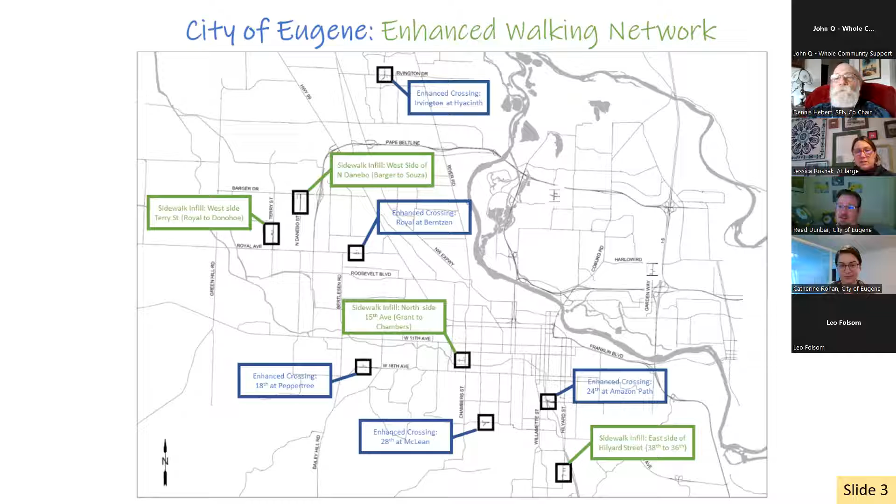And so we had talked about this, I think, for many years as we were scoping out both the East Amazon Bikeway project and then the widening of the sidewalks north of Tugman Park, which will eventually go through Tugman Park as well. We're still looking at some additional monies to widen out that sidewalk through Tugman Park, but that's a different project and that is not this year. So let's go to the next slide, which I think maybe just starts with where the sidewalk is.

Yeah, so that line in yellow is where sidewalks will be added, and it closes the gap from where there are existing sidewalks. So starting basically on that north side of Dillard, all the way up to almost 38th, where there is one lot there that has completed sidewalks, but then between 38th and just north of East 36th Place, there are no sidewalks. So as I mentioned, we secured a grant through ODOT. We currently have the plans at ODOT for review because we're using their money. We haven't heard back from them.

So tonight I'd like to talk about the timeline, but it's a little unknown right now because we wait for them to basically bless our plans and say, yeah, go ahead and go to bidding. But because we haven't bid it yet, we haven't had a contractor review the plans and give us a timeline for construction. So ideally we're going to start construction this year in 2022, and it'll be completed in 2023 for all of those projects I just showed.

Now, if they start any one of those projects in 2022, we've also asked them to finish those projects. So for example, if they decide to start the Hilyard Street sidewalk project, they also have to finish it in 2022. So we're not halfway done, or we leave something unfinished. It will totally be done. And I will get back to y'all once we have the timeline from the contractor, but we haven't bid the project yet. And so you can see what our problem is, we just don't have dates yet that I can share. But that's the extent of the project.

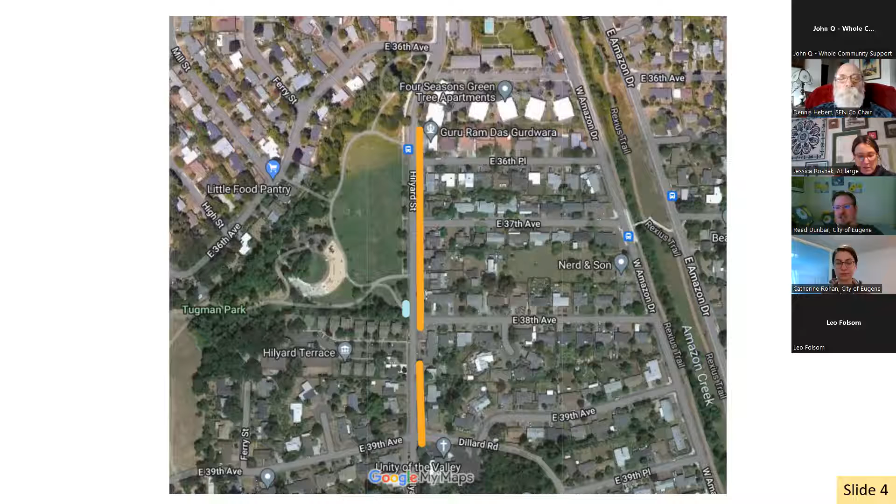The space next to the curb is generally also where a lot of trees live. And so it gives us space for street trees in the future. So sidewalks generally go behind that. And as we go through that, I think you'll notice that we were opportunistic about where the sidewalks were located so that we did not disturb existing plants. Next.

So starting all the way on the south end of the project, that line that goes this way at the top is Dillard. And then on this side, it's Hilyard. And you can see that we're just finishing off a little bit of the sidewalk where it ends. It ends before it actually gets to the corner. So we'll bring the sidewalk all the way to the corner. We'll drop it down at ADA grade, and we'll put a truncated dome in there for tactile detection so that folks know that that's the end of the sidewalk and they're entering the street.

I can see Jessica studying it.

Sidewalks are typically 5 feet wide, and so these are all 5 feet wide. We pour them about 4 inches deep.

That southern boundary is you getting into that church below that, right? Is that where I'm trying to place it here? Sorry. We are south of Tugman Park here, so we're just south of. Is the church there? I guess I don't know. I believe that's the corner of the church. Okay. Yeah, like right at Dillard. South of Dillard is the church. Then yes. Okay, the church is across the street from that.

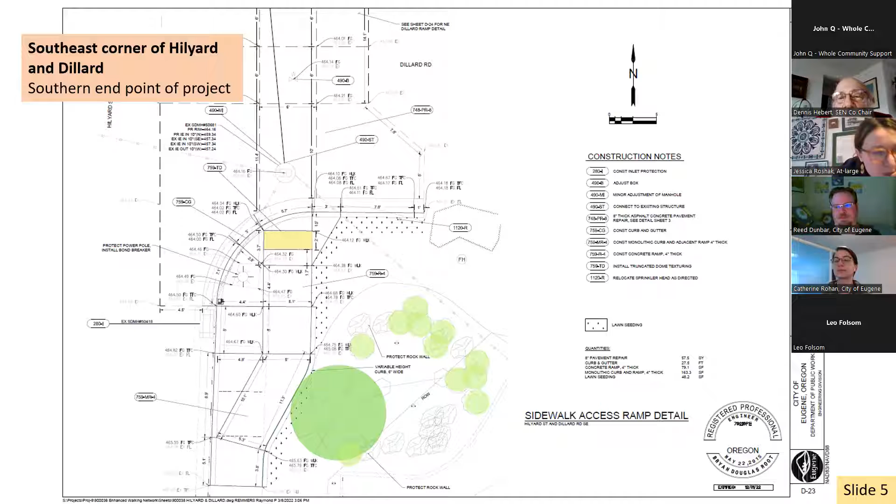Yeah, okay. This would be 39th Place, I think, going east and west, if I'm not mistaken. But it turns into Dillard at some point? Yeah, it turns into different Dillard things at Hilyard, because that one street goes on the south end of Tugman Park, and that's 39th. And then when it hits Hilyard, it turns into Old Dillard. Gotcha. So yeah, that's where it is. Next slide, Catherine, is just the north end of that.

Did we have the north side of the? No, the north side of that Dillard and Hilyard intersection is just a standard curb ramp. Okay. But with this slide, we did change orientation on you. So north is the right side of the screen, just so everyone knows. There are a lot of lines on these, so it can be tricky to interpret them. If you see the little squares that run from left to right, that is the sidewalk. We generally pour those in 5x5 squares. And the purple things are driveways.

So as part of the sidewalk install, to make sure that people still have access to their driveways, we'll rebuild the driveway aprons, the part that touches the street, and get that up to grade so that the sidewalk is flat again, and then pour a little bit more into the property to level that off so that people can get to their garages or into their yard. So it's not just sidewalks, it's also driveways, making sure they mesh well with the sidewalks we're constructing so they're all at the same level.

But not curbs. You're not redoing any curbs, correct? Correct. Would curbs come with the road repave, or would they be left as the old curbs? Not necessarily. If a curb has failed, we'll generally be able to get to that during a pavement project. But if the curb is intact, then we generally leave it and rebuild the street between the curbs. So it depends.

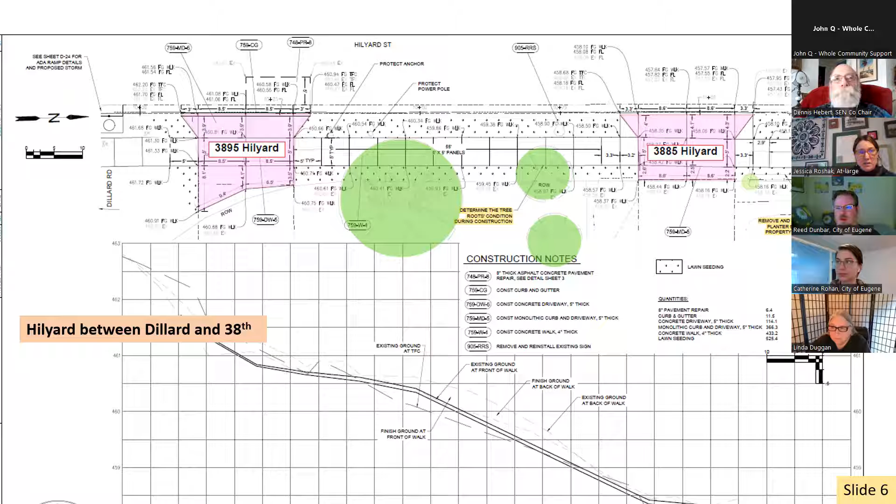So I think we can move on to the next one. So north is still to your right. And here there's another big tree. And you can see that the sidewalk is sort of snaking around that tree. Unfortunately, we do have to go curbside right there because to keep that sidewalk straight, we'd have to go through the tree and we don't want to do that. So there will be a little bit of the sidewalk that is curb tight. And then when we have an opportunity to move it back, we're going to do that, but it looks like we're going to cross a driveway before that happens.

Generally speaking, we try to keep the sidewalks as straight as possible so that folks with vision disabilities can predict that the sidewalk is just going to keep on going. But in order to preserve some of these trees, and especially the great big ones, our legacy trees, we do have to move around them sometimes. And this is an instance where we think that these trees are happy. The yellow notes are still there to determine the tree roots condition during construction. So as we're tearing up the ground there, we will peek at those trees and make sure that the roots are happy and that we're not going to disturb them with the sidewalk project.

And our city foresters, who are tree people, come out and inspect that and won't let us disturb it if it's potentially going to kill the tree. What they're doing is trying to figure out if the tree itself is happy. And so we may make field adjustments. For example, on the right side of that driveway, if that tree needed more root zone, we could potentially move that sidewalk up a little bit and just give it a little bit more room to breathe. But that would be a field determination based on whatever the roots are doing, which at this point, we just don't know.

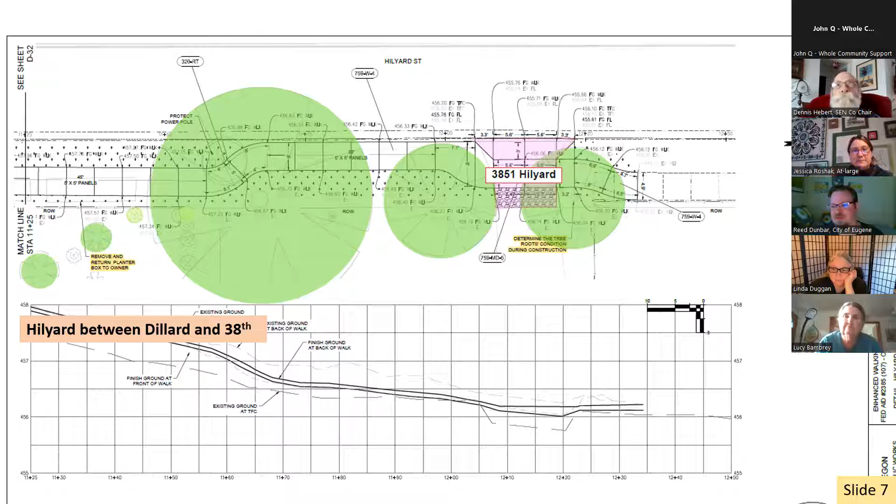So this plan is essentially our proposal based on best practice and standards. So yeah, if we need to make adjustments to that, we'll see if we're capable of doing that. And we'll find out during that investigation process with folks if that's something we need to look into. Thanks. Can we go to the next one, Catherine?

At the 38th intersection, sorry Linda, you had the sidewalk adjacent to the curb though, didn't you? Because it's already there. It's the existing, so it looks like it's set back. Oh, I can't see on Google Maps. It is set back. Yeah, that sidewalk has got a little green space between the sidewalk and the road right now on Hilyard. Okay, gotcha. Sorry.

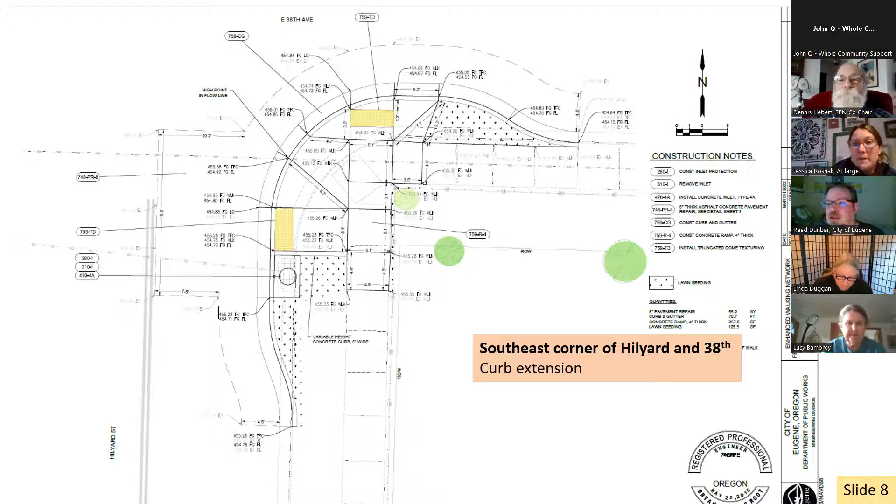Catherine, can we go to the north side of that intersection? We sure can. How about direction 2? Turned again on you. Yeah, so Hilyard is at the top here and 38th is on the left. Our engineers don't have any respect for cardinal directions. So anyway, we turned it a little bit on you.

So we're bumping out the northern corner too. And so it'll make the throat of 38th Avenue a little bit narrower. And what that tends to do is, folks in cars who are going around won't be able to speed through that corner as people are crossing across 38th. We will, of course, paint yellow curb on it, get some reflective markers out there so that folks know that this change has happened. And it looks like we do not have a crossing of Hilyard Street in this design. It's on that south side of 38th to match up with the ramp that's on the west side of Hilyard.

Sorry, say that again. You do have a crossing down at 38th on the south side? Crosswalk? So if you look at this design, it shows that our ramp from the sidewalk will come down, so you can cross 38th to another ramp. Yeah. But we do not have another ramp that goes across Hilyard on the north side of the intersection. We only have that on the south side. And that's because it matches up with an existing ramp that's over on the west side already. I see. So sometimes on an intersection, we'll do that based on what's existing. Yeah.

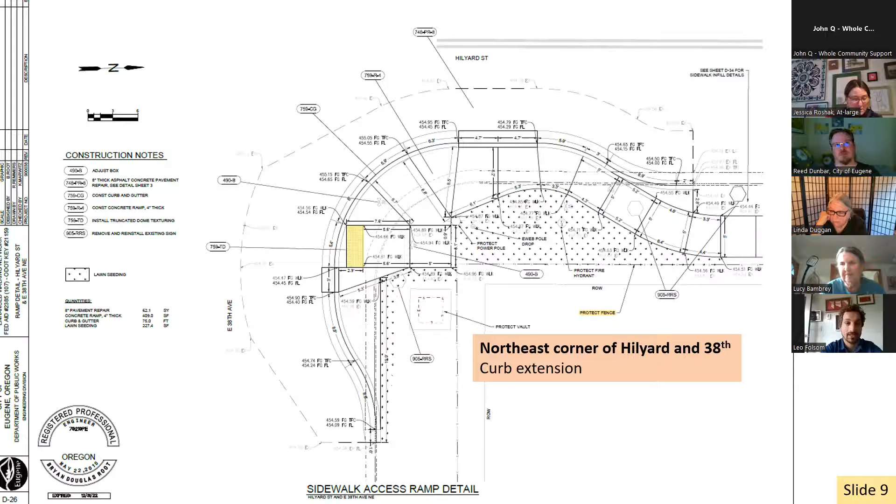We have a matrix that we look at. It's based on how much traffic is there, how fast the traffic is moving, if there's any curvature of the road, how many people are currently crossing, what the destinations are on both sides, if there's overhead lighting or not. Based on all of those conditions, we decide whether or not to paint a crosswalk. In this particular instance, our traffic engineer would prefer that we paint it once we've traffic calmed or slowed the speed down on Hilyard Street. So that's the order: traffic calm the street, make it a safer environment for people to cross, and then add the formalized crossing.

Okay, that makes sense. I'd be interested to see that matrix at some point if possible. We use the FHWA, the Federal Highway Administration, standard pedestrian crosswalk countermeasure table. If you go to the city's website and type in complete streets, you'll see our entire complete streets manual is in there, and in the crosswalks section, that table is there.

Okay, I'll probably follow up just to make sure I find the right thing. My question is less about this specific intersection and more that this is new information to me, so I'm just looking to understand it. Yeah, generally on crosswalks, the answer is it depends. There's a whole lot of factors that go into when we paint and do not paint a crosswalk, and it's an engineering decision. Linda, go ahead.

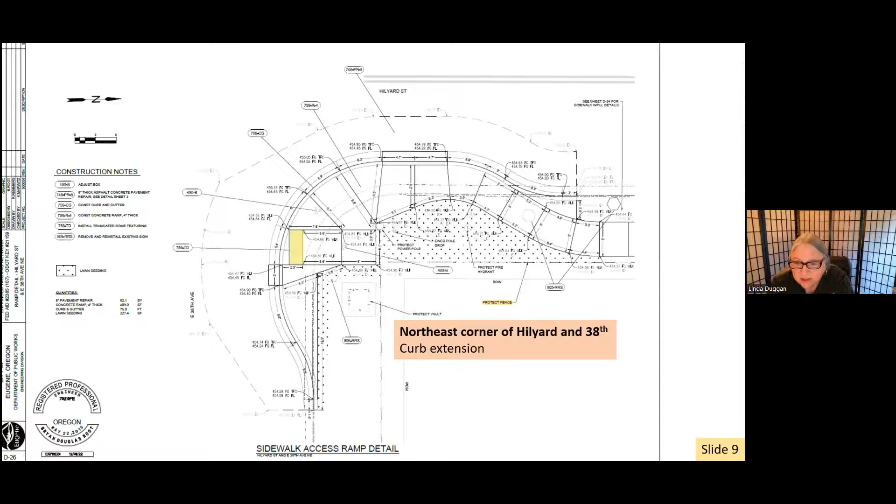At any of the intersections by Tugman, will there be any kind of painted crosswalk, but also flashing lights, like using solar, that people could use to walk across? So we start with the intervention that we think will work, and then we move up the scale. By the time we get to flashing lights, there's a condition that isn't being satisfied by the existing environment. We think once we traffic calm the street, a standard crosswalk will probably work up at 37th, for example, and we won't need the flashing lights. If folks still aren't yielding at the crosswalk, the next step would be adding the flashing lights.

So we iterate as we look at these things. And we do have examples where we've gone back to crosswalks that we thought were sufficient and retrofitted them for more interventions like those flashing lights.

Right, but we have lots of kids that use that park and go across the street. And I'm sort of concerned that we wait till something's happened or not working before we are proactive and have a crosswalk there. I mean, to me, it's a logical place by the park for people to be able to cross the street safely, especially kids is my concern. Yeah, I understand that completely.

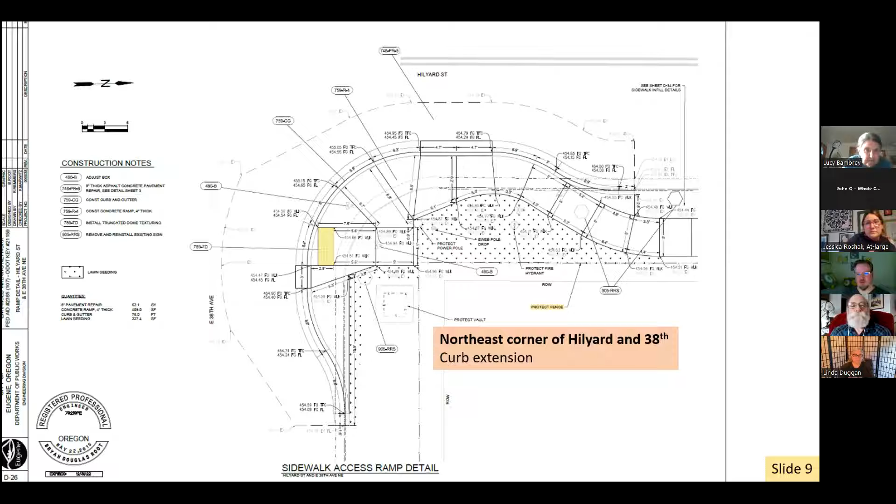So we need to move on so we have time for other things, but it looks like the sidewalk jogs. Is that because of the utility pole? It doesn't go straight? It looks like we have a fire hydrant in there. Yeah, there's a fire hydrant there and a pole, both. EWEB pole. Yep, there's an EWEB pole. I see the marking for that. Yeah. And a fire hydrant. So we're trying to avoid both of them. And then it curves because we have that curb extension. Catherine, if you go to the next slide.

Jessica, should we move on or are we just out of time for this topic? No, I think this is really important. Okay. I'm really glad you're here.

I have one concern. I appreciate the bump outs and I know that's sort of standard practice at this point. When people are going to be turning right around a bump out into Hilyard, my experience with the bump outs on East and West Amazon and in my neighborhood is that it sort of juts you out farther into the oncoming lane of traffic. And seeing as there's not a whole lot of leeway there on Hilyard and cars are going very fast, that bump out, if you're turning right, I've actually seen on West Amazon a kind of collision for that reason. And it's problematic.

So I'm not presuming that those bump outs can be changed, but I do want to bring up that turning out around a bump out into a busy road, especially for a bigger vehicle, like if you're driving a truck or a trailer, is extremely concerning.

Yeah, so a lot of our streets were designed in the 50s and 60s based on the Highway Capacity Manual, and they are as wide as they are because we said, let's make everything wider. The result of that is 40,000 deaths a year because people are driving too fast. And so what we're trying to do with our Complete Streets initiative and our Vision Zero efforts is to narrow things up so that our most vulnerable users, people on sidewalks, people on bikes, have protected spaces to be, and people in cars have to slow down.

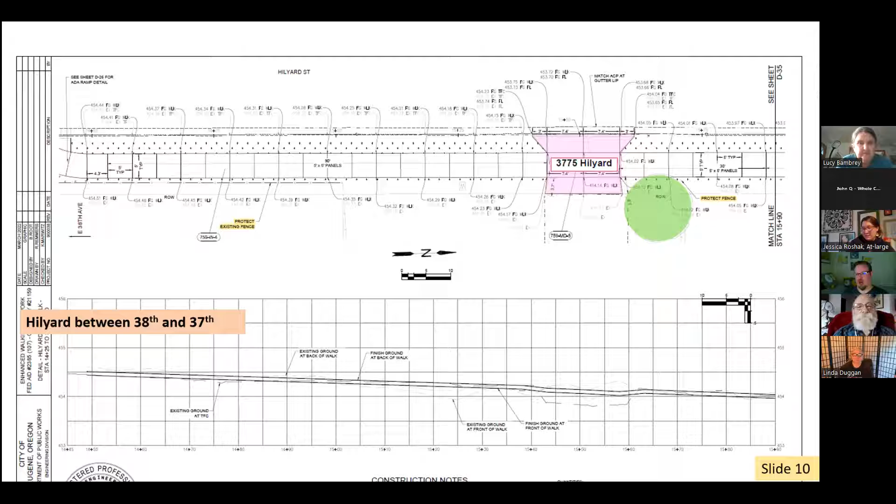This one too, one of those yellow notes says protect existing fence. We're going to do that on both sides of this driveway. There is a new driveway apron as well, and a tree that will be protected as part of the construction project. So this block is pretty straightforward. Go to the next one, Catherine.

So here's one where there's a small bush where we say we're going to have to remove that bush. And then there's a tree that ends up very close to where the sidewalk is going to be placed. Based on comments I heard earlier today, I'd say that maybe we could avoid that entirely if we move that sidewalk a little bit closer to the street. That could be a potential answer. And we can talk about that when I talk to the project engineer about this.

But we tried to avoid the trees here. When trees come close to the sidewalk, we'll have the city forester come out and make sure that we're not doing any harm to those trees. Next one, Catherine.

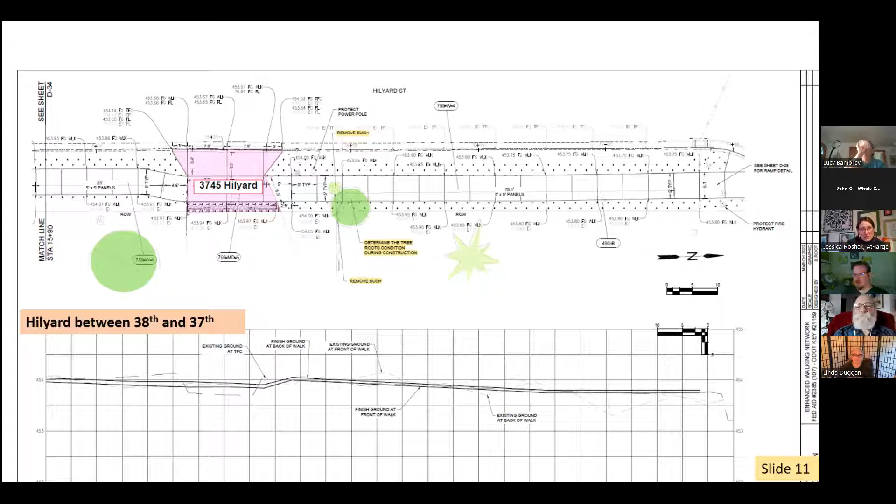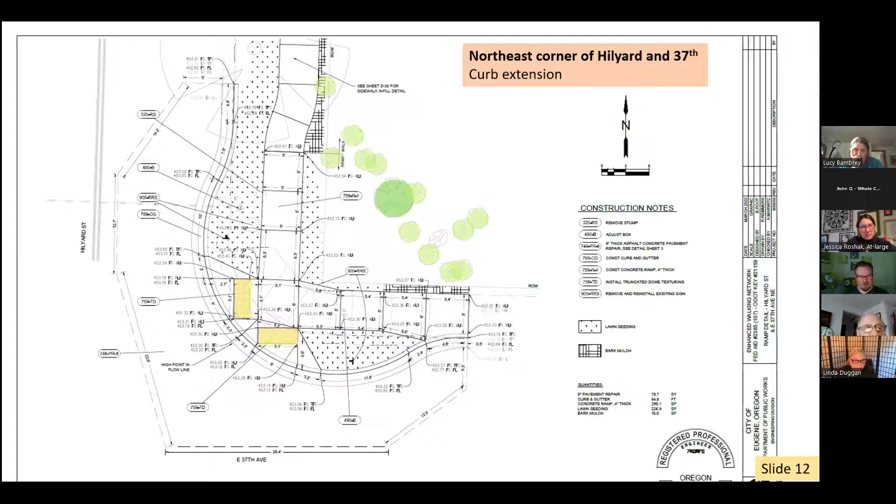We weren't able to do it as part of this project because of the type of grant money that we're using. We're using federal money here, and so we can't go outside of the project corridor. But we're extending the curb into both 37th and into Hilyard with this design. Next one, Catherine.

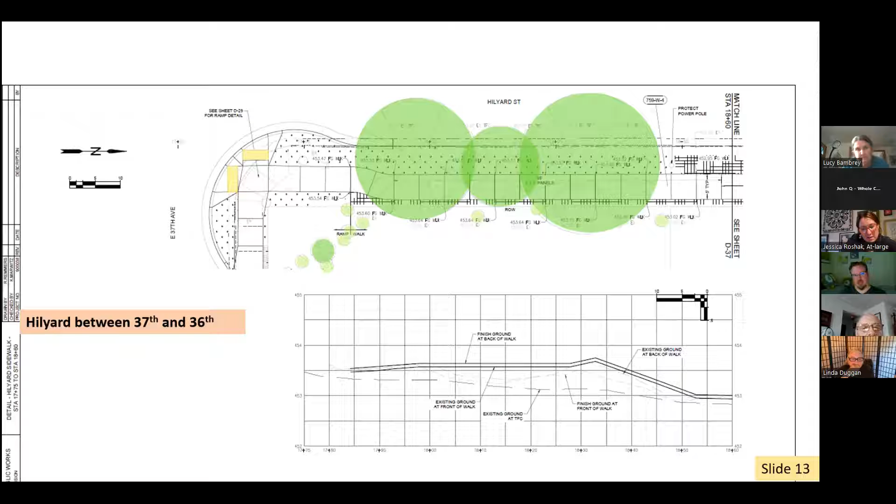So here's another view of that and some big trees that exist just to the north of 37th. We are avoiding all of those by shifting the sidewalk a little bit outside of the root zone. And also it says protect power pole. So there's also going to be an EWEB pole there. And so we can avoid the trees and the EWEB pole by simply shifting the sidewalk a little bit to the east. So that's the plan there. Next one, Catherine.

And then we just run that straight to 36th Place where we'll add a curb ramp. I think the next one is going to be a little different. This is by the Sikh temple where they have two driveways. So we'll re-pour those driveways and run the sidewalk a little bit east of where the planter strip would be adjacent to the curb. And then that will align well with the existing sidewalk just to the north of their property, which is also set back, and there are also street trees at that point.

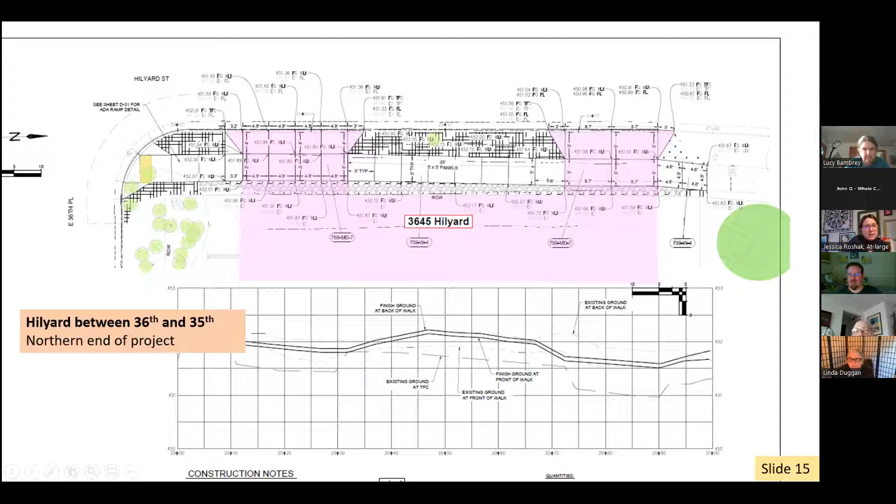So if folks wanted to come in and put street trees and make that consistent down Hilyard, there's going to be space to be able to do that within that setback area. And I think that's all of our drawings. Catherine, do we have any? I think that's all the drawings. Yep, that's all the drawings.

So, well, Reed, you already kind of spoke to the timeline. Yeah, this timeline is we'll find out together because we haven't bid this yet, and so the contractor hasn't had time to digest it and then create a timetable. But as soon as I have that, I will let you know. And then our very last slide, we've kind of been asking questions throughout, but here's my contact information, which Jess, you already have. So you can get it all from Jess, or you can take a photo of this screen or just write it down. But you're welcome to email or call me with questions.

I just want to clarify, there's only parking on the west side by Tugman Park, right? There's no parking allowed on the other side? Is that correct? I think there's parking on both sides. Yeah, I don't think that's true. There's only parking restrictions where we sign it. There aren't any signs, so there wouldn't be parking prohibitions.

Okay, well, I don't think it's necessarily going to affect this project, but you know, some of us have real concerns about middle housing not requiring parking on the site. And our streets up here in this neighborhood, some of them are extremely narrow. So they didn't get in on that widening in the 50s and 60s or whatever. We have extremely narrow streets. And when there's more cars parked, even more than there are now, there are going to be issues.